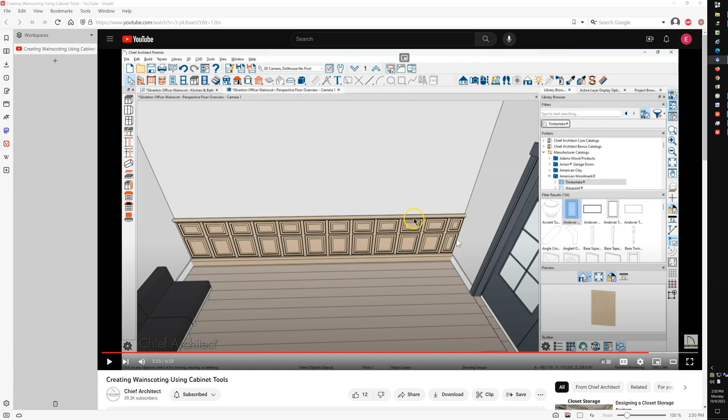So I'm going to talk about some of this stuff and try to expand on what they've done a little bit.

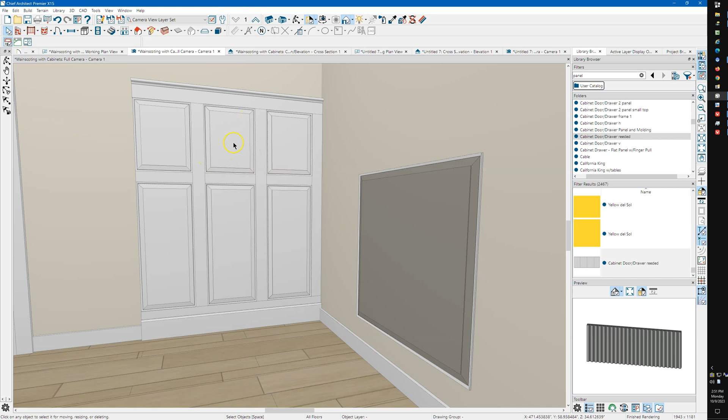A while back I made some of these raised panels, and this one has a little bead or detail around the outside edge of it. And I made this into a door or a drawer head. Instead of just sticking a door in these cabinets, I used this. So there's no frame around it, which there shouldn't be. Normally in wainscoting it looks like this, it doesn't look like a frame with another frame with a raised panel or flat panel inside it. I just think this looks more realistic.

So let's look at a couple of these things. This is a cabinet, this is a cabinet, that's a cabinet, and that's a cabinet. And the difference between these is this one has a stile. Let's open up this one, and you can see this one is missing this stile on the left-hand side.

And that's because down here where it says left stile, I've got it as 0. And then this one over here, down here, it says 3. If you look in general, or box construction here, it's framed, its separation is 3 inches - that's where that 3 inches comes from. And you could also play around with this left stile extended and right stile extended.

The other thing is that if you watch Scott's video, he does not set this to 0. He leaves it at, I think it's a 16th, the default. And that is the reveal - that's the gap between the door in the center and the frame around it. So you normally want that to be 0 when you're doing this, because you don't want a gap in there. You can actually see through that gap, even at a 16th of an inch.

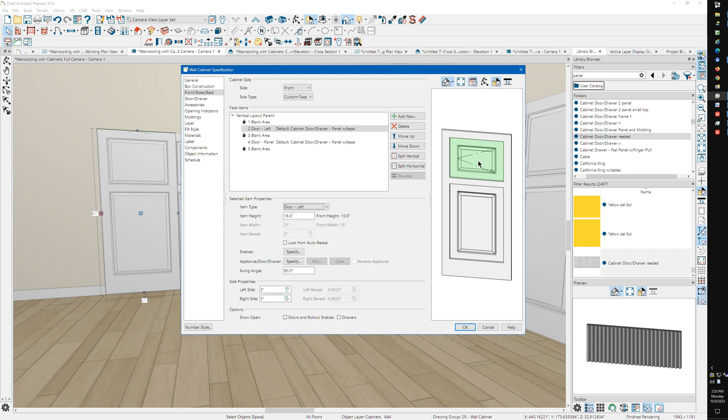And in his video he makes these things a door, and then he goes over and removes the hardware from the door. If you just make it a door panel, that gets rid of the hardware and it gets rid of the opening indicators. If this is a door, you get opening indicators, which you don't want. So I'm going to cancel out of that.

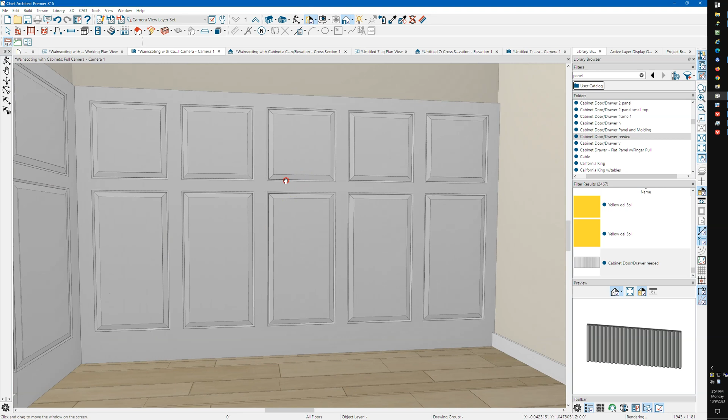Another problem with using cabinets is that Chief has a built-in rounding, I guess you would call it. So let's go back over here, let's look at these cabinets. These needed to be 19.4 inches wide to fill this space in here.

And if you look at one of these, it's 19 3/8. If I put 0.4 in here, it changes it. So it's really hard to be accurate, even though that's a really small amount. It's hard to be accurate when you're using just a regular cabinet to do this, which is annoying. You know, if you put a width in here, no matter what it is, that's what it should be - it should not be modified. A lot of people won't even notice that.

I got in a long time ago, when I first started using Home Designer, I got used to making a change - it used to be I would do this, I would make a change and I'd come down here and I'd click OK. And then I'd find out that what I changed, the number I keyed in wasn't the number that the thing measured anymore. I'd have to come back and I'd see that Chief changed it. So now I'm trying to get in the habit of hitting tab so I can see what Chief is going to do, if anything.

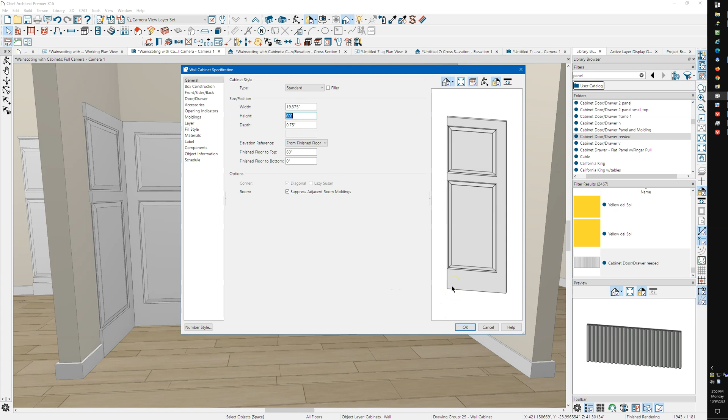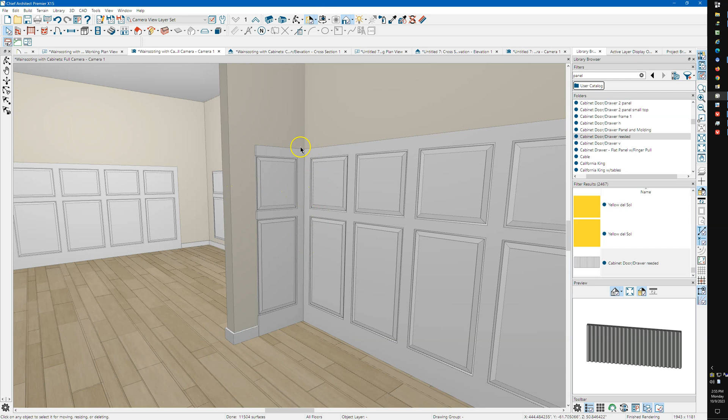But anyway, the other problem with using cabinets, they're quick, they're easy to do. But when you've got cabinets in a corner like this - which, when you're running wainscoting around a corner, is a pretty common situation - if you go up here and turn on create automatic blind corner cabinets, you see what happens: Chief messes with the cabinets. And I don't think there's any way to tell an individual cabinet not to respond to that setting. So if you're somebody that uses that setting, if you keep it on all the time, you're going to have this problem.

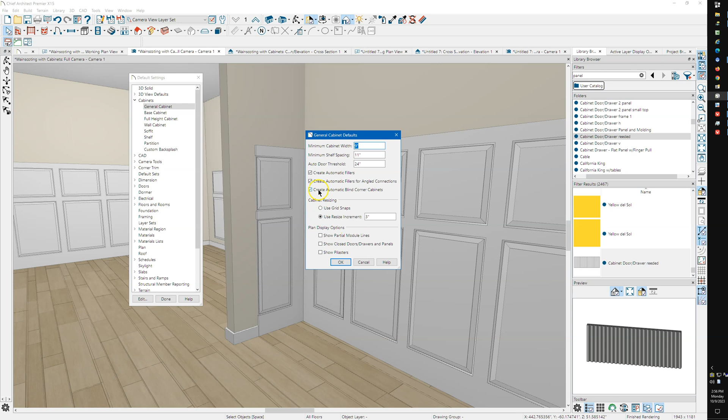And so I'm going to unclick that, and it goes back to where I put it.

What you can do is make a symbol. You can select one of these cabinets and make a symbol. These are symbols, and the thing about a symbol is you can change its width accurately. If you want this to be 19.372727, you can key that in and that's what it'll be.

One thing I noticed is that when you make these into a symbol, you get these lines. Now I'm just using standard view with hand-drawn lines on top. I like the looks of that better than vector view, it's a little calmer looking. But you get these lines. You notice that these cabinets over here have no lines.

And if you're doing paint grade, this is great. This all blends together, it looks really nice. But if you're doing wood grain stuff, I don't think I would do it this way, because you need to make these pieces individual so you can apply wood grain in the correct direction to all these different pieces. You'd want these rails all to be one grain direction and the stiles to be another.

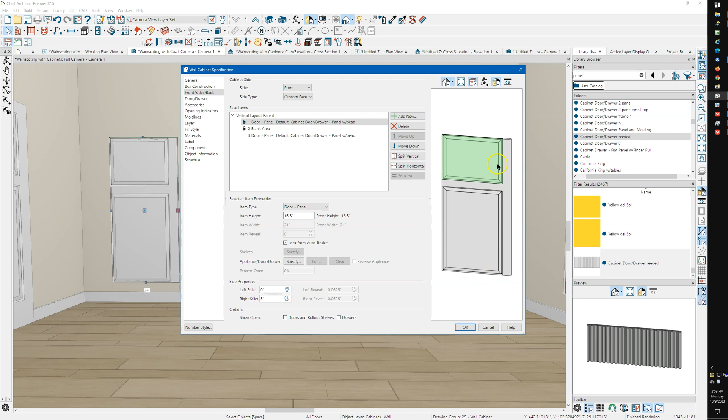Now if I was doing this, and I've done this in the past, this is the way I would do it over here on the right hand side. I'd use a cabinet like this, and this is just a cabinet without anything above here, and nothing down at the bottom. It's just a minimal cabinet with these raised panel things in here.

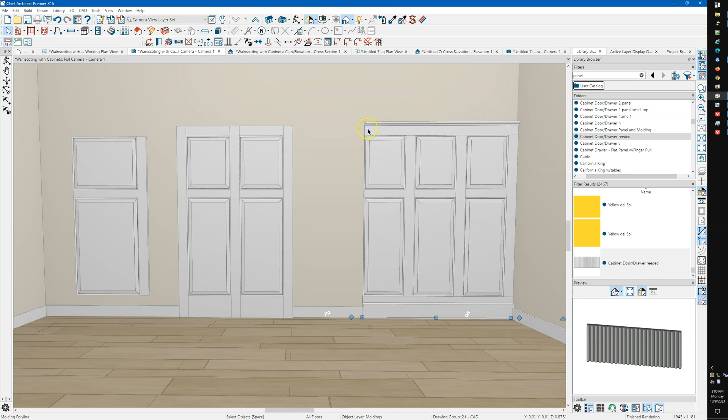And so that's what you see there and there and there. And then to get this top piece and this bottom piece, and this molding across the bottom and across the top, there's a single molding polyline down at the bottom, and those are all moldings. So this rail across the top, this rail across the bottom, this base, and this little molding at the top are all moldings that make up what's missing out of this over here.

And the reason I like doing that is because you can see in this view all the stiles and rails, even though they're painted and it's not really that important, they all look correct when you've got lines showing like this. If I was going to build this, go out and assemble something like this, this is the way it would get built.

And with symbols, you don't have to worry about bumping stuff into the corners, because symbols are not cabinets. They don't respond to that blind corner cabinet setting. And you can copy and paste these symbols, multiple copy them and things, just like you would a cabinet or anything else.

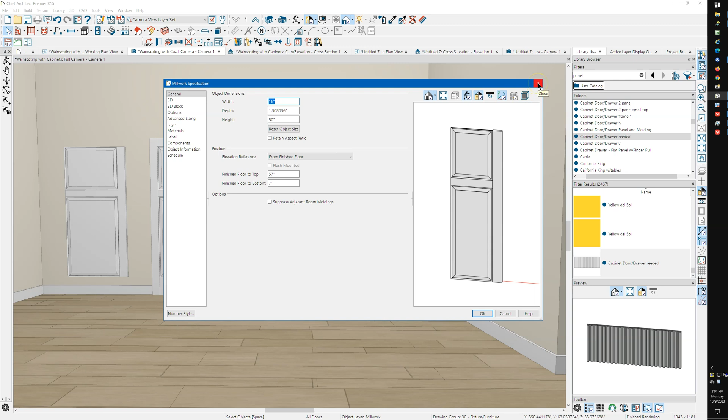So, and I made these. I'm not sure it matters, but these are millwork, which to me makes sense. I mean, that's what they are, they're millwork.

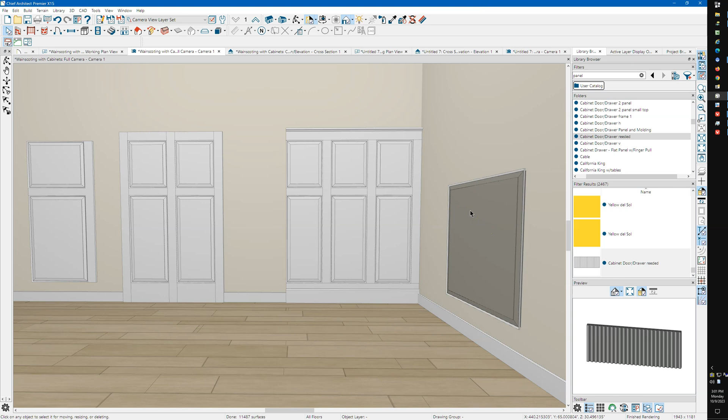So there's kind of a bunch of nuances, just like everything else in Chief when you're doing this stuff. But I would encourage, if you're interested in doing this, I made these because I use them when I'm making a full-size door. I've got other videos, I'm sure, on my website or the YouTube that talk about making these.

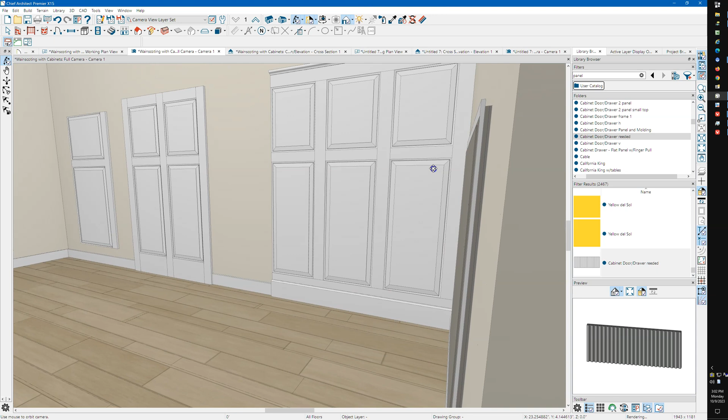I probably started with a countertop and just stuck a molding on the edges. That's real easy to do. I probably made this molding, and it's hard to see, but this particular one is double-sided.

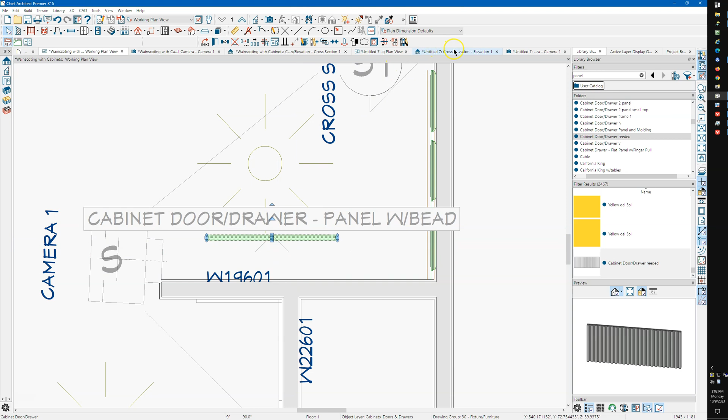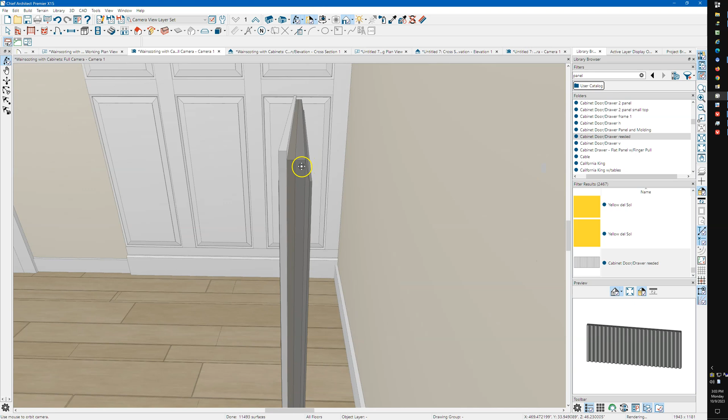And that's because, like I said, I use them to make full-size doors. And they're different colors, a little bit, not much different, but they're different materials because sometimes you want to paint the inside of a door different than the outside, and this just makes that easy. You can because you're painting a material, not painting the whole thing.

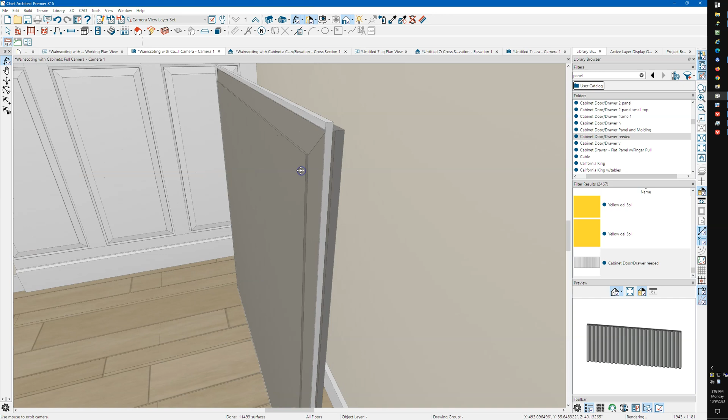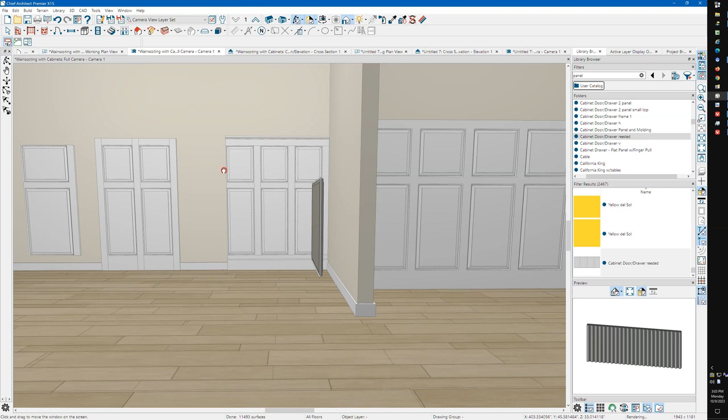Anyway, like I said, I wish Chief would go through a bunch of this stuff in their videos so people would learn more than just how to knock something out that doesn't look very good. I mean, Chief ought to go through making a raised panel like this that you can then use in these things.

The other advantage to just using a cabinet like this is these things are easy to do. I just made this thing for somebody else. So all you need to do is click in there, and that changes the door quickly.

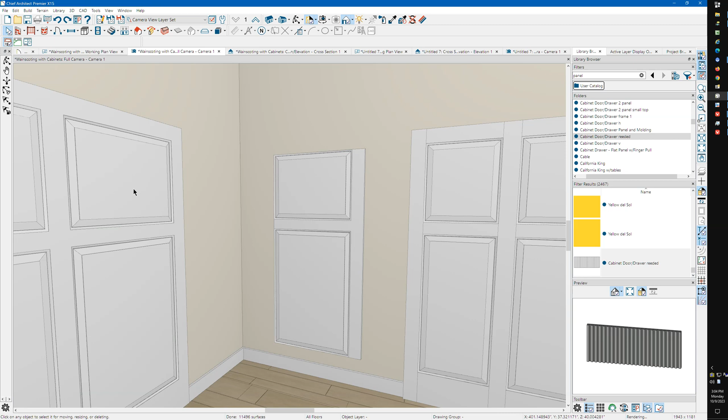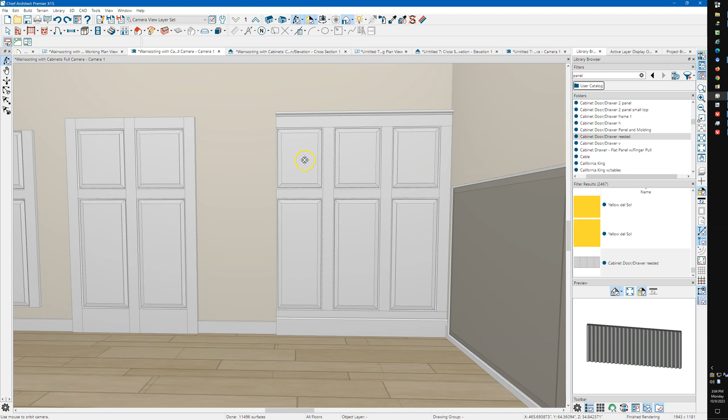I'm sure there's some more stuff, but like I said, if I was doing this to be more realistic, if I was going to make this stained and want the wood grain going correctly, I would do this differently. I wouldn't start with a cabinet, I would start, I think, with this.